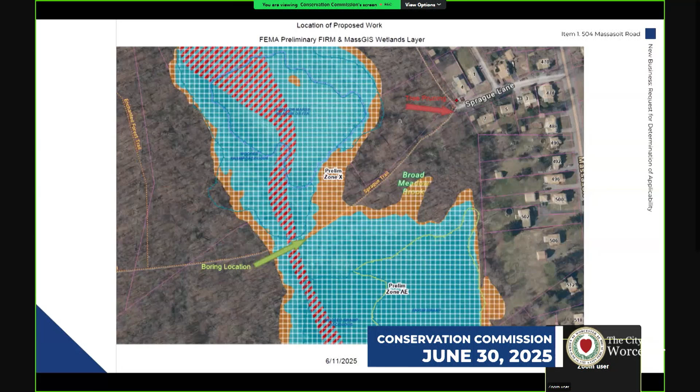So they're going to do one boring, which is located just at the end of the trail. It's within bordering land subject to flooding, within riverfront area, and within the 15-foot buffer zone to the bank of the brook, but it is outside of BVW. It's at the end of the trail, just outside of the wetland area. They're going to access the site using a tracked machine to get down here and dig the boring hole.

The work is expected to take one day. They're going to backfill all the spoils into the hole at the conclusion of work, and they should be in and out in a matter of hours. There will be some tree pruning necessary along the part of the path that's closer to Sprague Lane.

Which is well set back from the wetland areas. There's no tree removals associated with this, and the machine will be accessing this location on a compacted trail. Spill kits will be present on site. And I think that's about it. So I'm happy to answer any questions the commission has.

On the screen here, this is just a screenshot from Google Earth showing where they're going to be accessing the site from Sprague Lane. Going to relocate that boulder. This area here is outside of the buffer zone, but just to illustrate the kind of necessary tree pruning that will be needed. And we also have the equipment here, and I'll turn it over to the commission for any questions.

So this piece of machinery is a self-propelled piece of machinery, or is something bringing it into the woods? Yes, it's tracked machinery that will drive in, along the path. And so the only machine going in and out? Correct. Okay.

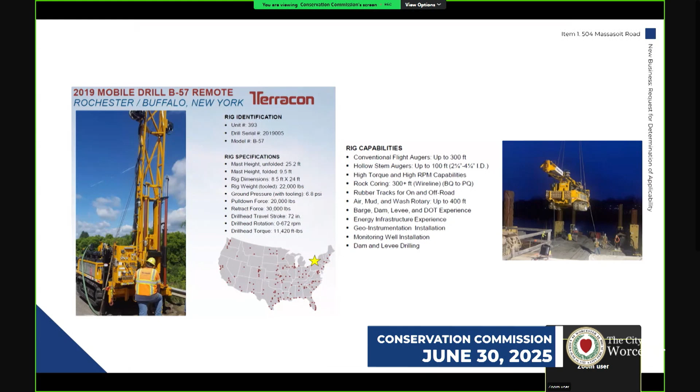Any reason to think that they would require additional borings, or would you be able to get all the samples that you need in the one visit? Additional borings aren't anticipated at this time. The engineering team is confident that the conditions in the area should be uniform enough that one boring will suffice for the design.

Okay. If any of the other commissioners have questions about this project? If you guys could just, yeah, I'm all set. Thank you, Stuart. Because I can't see you, so if you could, Lindsay, just say yes or no. I'll take that as a no. Are there any questions or comments from the public? Anybody curious about this or any questions? No?

Is there a motion to close the hearing? So moved. Second. Did we go to public? Oh, we did public, okay, fine. Yes. Okay. So then so moved if there's no objections. Second. Did I not need to close the hearing on this one? We can close it. We just need a motion for a determination, either a positive or a negative determination. Okay. But we can close the hearing. That's fine.

I move for a negative determination. Second. Commissioner Kirschner? Aye. Commissioner Nystrom? Aye. Commissioner Fertoni? Aye.

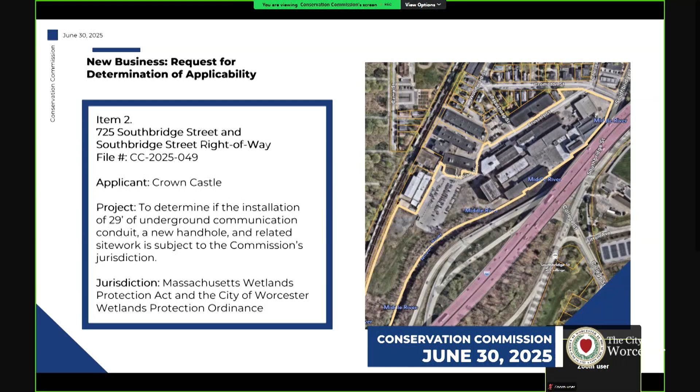Do I press this? It's green, on. So we should be able to hear you. Good afternoon. So my name is Magdalena Lofstedt. I'm a wetland scientist, and I'm representing Crown Castle.

We filed an RDA to seek permission to install approximately 29 linear feet of a communication conduit. It's a 4-inch diameter. It would run from Southbridge Street. The property in question here is 725 Southbridge Street.

The new conduit would run from the existing handhole that's located within Southbridge Street. I don't have a pointer, but if you want to, you can bring your microphone up if you want to point to the location. It's pretty clear, it's the red box. Yep, okay, great, thank you so much.

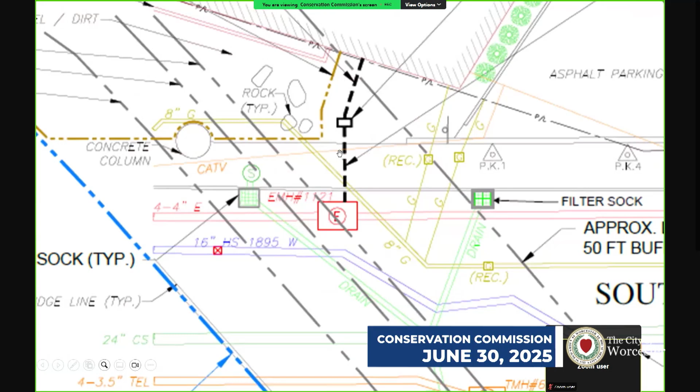It would run from that existing handhole to the building, and in addition, a Crown Castle manhole or handhole will also be installed. The area is previously disturbed. As you can see, it's a degraded landscaped area. Then we have the concrete sidewalk, and then the existing handhole is located right along the side of the street, just beyond the concrete sidewalk.

The purpose of the project is to boost wireless speed and capacity for the new owners of the commercial building. The conduit will be installed using open trench excavation. The trench will be 4 feet wide and 3 feet deep. Upon completion of the installation, all existing grades will be restored to pre-existing contours. The work is located within the 50-foot buffer zone, the 100-foot buffer zone, as well as BLSF according to the preliminary FEMA maps.

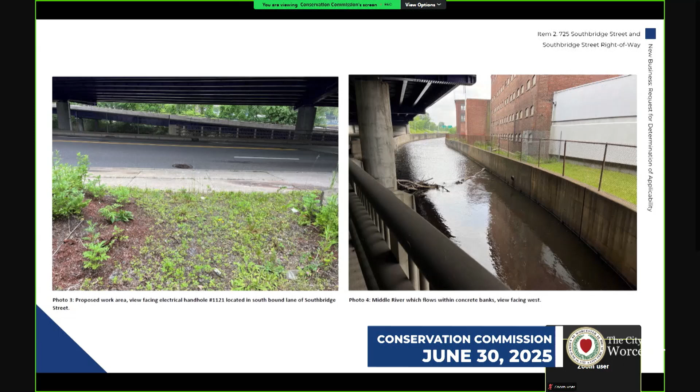It's filed as a limited project according to 1053-3D, so it doesn't require a filing under the Massachusetts Wetlands Protection Act under minor activities in buffer zone.

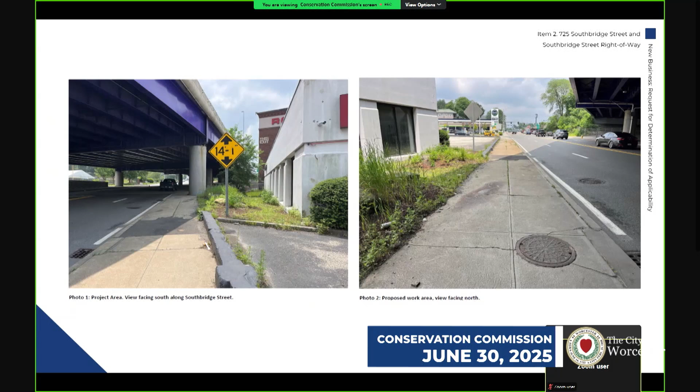The total disturbance within the buffer zone is approximately 120 square feet. Out of that, about 100 square feet is within the 50-foot buffer zone. The only work within the 30-foot no construction setback is accessing that existing handhole within Southbridge Street, so there's no excavation in the 30-foot zone.

We are proposing to install filter socks in the existing catch basins to prevent any sediment from entering the Middle River, which is the resource area that this work is adjacent to, and also compost logs along the limit of work, shown in brown on that plan.

A traffic management plan will be developed. The work meets the performance standards of the local ordinance and regulations for work within buffer zone, and also meets the performance standards for work in BLSF under the Mass Wetlands Protection Act.

So I guess I'll open it up to questions. Staff?

Staff's main concern was it's within bordering land subject to flooding, so we requested that they provide evidence that they meet the performance standards of bordering land subject to flooding, which they do, so they're going to return to existing grades. We also requested that they show inlet protection in all the catch basins, which they have updated in the plan provided today, showing inlet protection on all those catch basins. So no concerns from staff at this time.

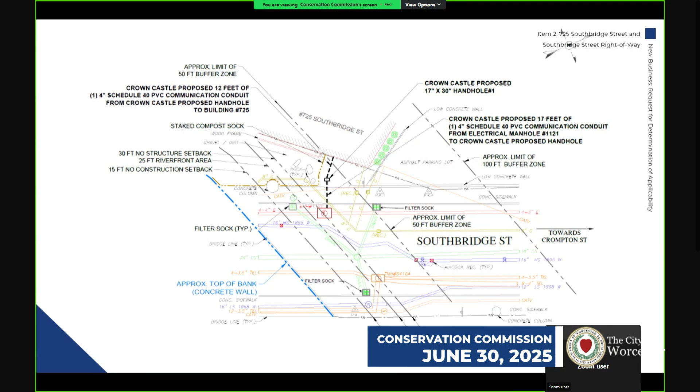Item 3 was postponed. Item number 4, 277 Providence Street.

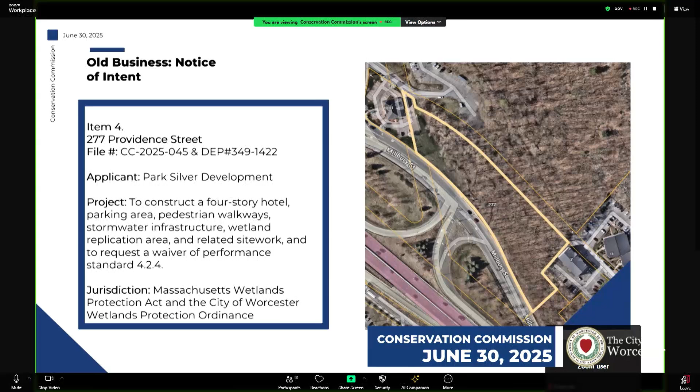Hi all, Tom Schutz from Goddard Consulting here on behalf of the applicant at 277 Providence Street.

At the last hearing, we introduced the project to the commission, and we've now made some changes and improvements to the site and added some replication to our site, because previously we had submitted the application without any replication, even though we were filling some bordering vegetated wetland. It took a little bit of work, but we've come now with 1.5 to 1 square feet of replication for the wetland that we will be potentially filling.

Right in the middle of the site is the bordering vegetated wetland. It's 1,545 square feet. In order to mitigate for that and get to the 1.5 to 1 mitigation or replication required under the Worcester Wetland Bylaw, we have 2 replication areas.

One replication area is in the northern portion of the site, approximately 1,603 square feet, and a second is in the western portion of the site, essentially 960 square feet. That total is greater than the 1.5 to 1 ratio required under the bylaw.

This is just a small replication planting plan. We'll be submitting a full comprehensive replication plan and procedure later on. This is just to show where the plants are going to be going, the species we're looking to put in, and also the type of seed mix.

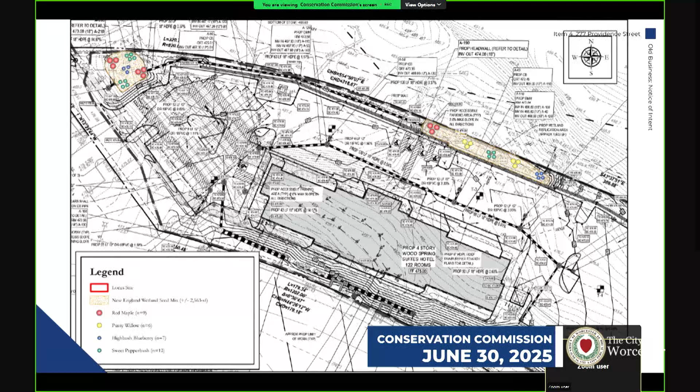Okay, thank you. So do we need to vote for a continuance or postponement? Are you guys okay with the next hearing on July 21st? So it would be a motion to continue the hearing to July 21st. So moved. Second. Commissioner Kirschner? Aye. Commissioner Nystrom? Aye. Commissioner Tony? Aye. Okay, see you next month. Thank you.

Next item, number 5, 522 Grove Street, notice of intent.

I think we have the applicant online. I just gave you permission to unmute yourself, Sebastian, if you want to give a quick overview. Absolutely, Sebastian, the owner of 522 Grove Street. We've been working with the city to take care of the dock at the end of the property, and also the boat dock with the pontoon on the end that we're getting through the permitting process with the city. We've been working with Maddie Vanderboom, she did a site visit and talked us through doing the paperwork properly, and here we are now.

Staff comments? As the commissioners may remember, this was an enforcement order, or it still is currently an enforcement order, issued back in 2020 essentially for the structures, the deck at the end of the peninsula and the new dock. The commission voted to require that they file a notice of intent to properly permit these structures. They did waive the need for engineered plans for the dock and the deck, so staff helped them work through it, and DEP finally issued a file number. They did have concerns about BVW being present on the site, but staff conducted a site visit and confirmed there wasn't BVW on the site.

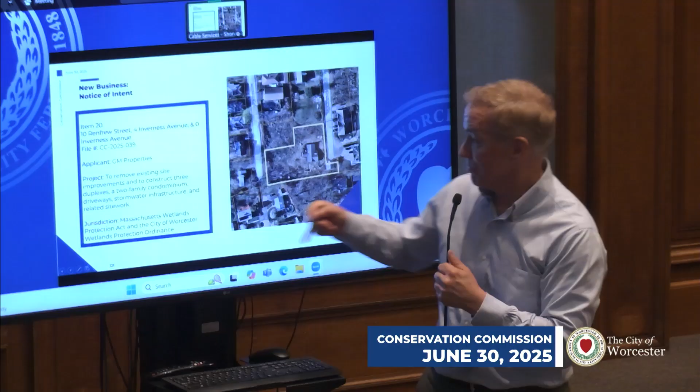Yeah, you can see it on the aerial view. You're not driving through here, at least not easily. And so that's what's in place now. You can see that there must have been more yard at one point, but it's rather overgrown now.

The applicant at different points had looked at different options for what he might try to do on site. That's why we actually went out here 2 different times doing deep holes. The site is all mapped as Chatfield-Hollis Series soil, one of the kinds where, when you see it on the map, you think okay, are we going to have ledge here? And we actually did, on something like 4 out of 5 deep holes - we didn't have a big machine, so maybe that's a factor, but we got refusal in the hole, meaning we could only dig so far down before hitting rock that couldn't move.

But the soil itself was actually pretty good. We characterized it all as sandy loam, but it was almost the next category up, loamy sand. So we're actually being a little bit conservative in all our estimates of how much effect we're going to get from infiltration of groundwater. So what's proposed - I guess I'll ask you to jump back to the other sheet again -

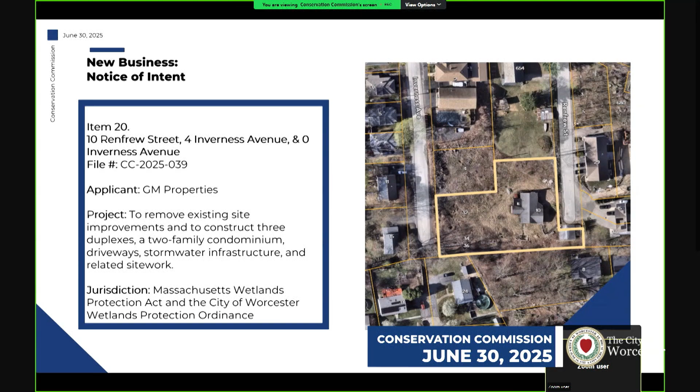is 2 duplexes on Inverness Ave, another duplex on Renfrew Street, and a 2-family condominium at the very end. These would all have pretty moderate slopes. Nothing is going to exceed a 2-to-1 slope here. We're not even proposing any retaining walls. We have no wetlands on or near this site.

I do want to say, yeah, this is the benefit of coming to the meeting. You see a question, go to another person, you say, oh, did we handle that? And you ask someone about catch basin protection, and I went back and looked at our plans, and I thought we had put in a note saying there would be silt sacks in these 2 catch basins, and these 2, before work starts, but there is not a line to that effect. So we would certainly expect, if there's an order of conditions issued, that that would be added to it.

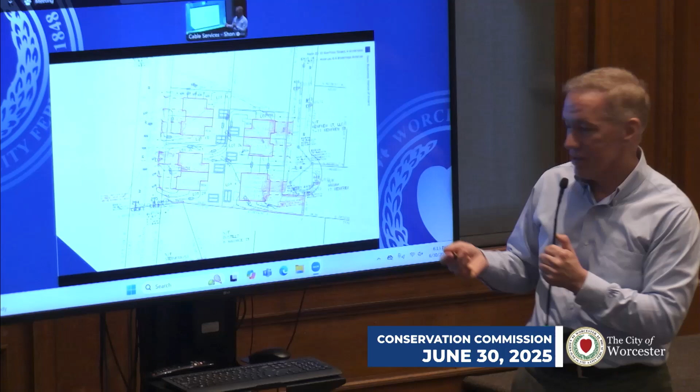So again, we're here because both of these buildings are within 100 feet of this catch basin. This one obviously is within 100 feet of this one. 100 feet just gets you onto this lot, doesn't quite hit that proposed building, but this is why we're here - the proximity of work to catch basins, again, both existing ones, on Inverness Ave and on Renfrew Street. And it's actually kind of an interesting spot.

This is sort of an abandoned house. If you go out there, I don't know how long it's been since anyone was living there, but you have a kind of interesting effect. You drop down away from Grafton Street, and you don't really experience the noise or whatever of Grafton Street in this particular spot. It's kind of a nice little spot.

And again, we're going to grade this - there's sort of 2 levels here. You sort of have the 514 and 516s, and you're in the 520s to 530 at the front of these lots. These buildings would both be walkout back, where this one would not be. This one would also be, and just to make the grades work with the least amount of work.

And what you see here, these symbols with some hatching in each case—this is an infiltration structure with 4 Cultec chambers for each unit, and a single one receiving the condos.

So what we have for you, I think, is a pretty straightforward, pretty unobjectionable project. I did leave one note out, which I realized after listening back to a couple hearings: if it was the commission's sentiment to issue an order, I'd ask that silt sacks be in place before any earthwork begins on any lots. But I'll try to answer any questions.

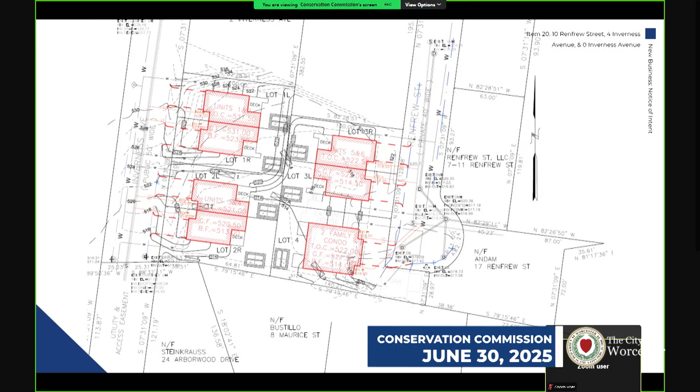Yes. So the stormwater calculations indicated there'd be a slight reduction to the abutters. The way it was modeled to the abutting property of the gentleman speaking: during the 2-year storm, pre-existing conditions have 0 CFS of flow; 10-year storm, 0.01 CFS; 25-year storm, 0.02; and 100-year storm, 0.05. Those were reduced to 0, maintained at 0.01, reduced to 0.01, and 0.03 CFS under those four storms. In fact, I just realized looking again at the plan that we actually specifically created a swale here to keep the runoff from the side of this unit from going to Mr.

Steinkrauss gets very little now. So this swale, if you look at this 514 contour going from the back of this unit, comes around, goes towards Inverness Ave, comes back, and that's all to indicate that you're creating a swale to catch runoff. The raindrop that falls here in the future would go down and then over and probably eventually get

into Bustillo's property, where most of the runoff goes now. So we actually did specifically grade it to keep future runoff away from you. But it also sounds like runoff from the street going into Inverness Ave is also making its way down to your property, and that's where we're seeing the biggest increase in peak flows.

Biggest being a moderate term here, because we're still talking about less than 1 CFS, but we're going from 0, 0.01, 0.02, and 0.05 to 0.09, 0.18, 0.26, and 0.43 to Inverness Ave.

So I guess that's why we would want to see peak rates reduced to all design points, so that there wouldn't be any potential negative implications for the city drainage and for the property owners abutting it.

You said one of the drains was completely buried. Yeah, one of the existing catch basins at the end of Inverness. Does anyone know the condition of the structures themselves? Is it completely buried? I assume nobody's been cleaning it out.

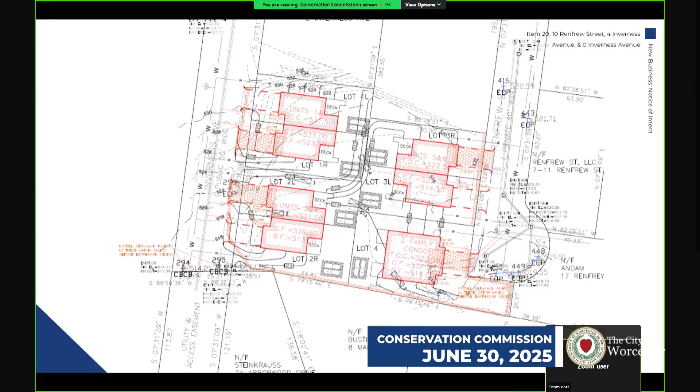So moved. Second. Commissioner Kirchner? Aye. Commissioner Nystrom? Aye. Commissioner Fatoni? Aye. Okay, so we'll see you in July. Thank you. Okay, thank you.

No additional hearings, right? Seven postponed, 8 postponed. Number 9, request for certificates of compliance.

So first up, we have 262 Mill Street. You guys may remember this project. This was the enforcement order we issued for a veterinary clinic who was supposed to do wetland replication. They had come for a COC, and we noticed that they never did the wetland replication, or at least it didn't take. The project originally came through in 2001.

Right now, they're looking for a partial certificate of compliance. Essentially, it's a tiny little lot, the proposed Lot A on the plan here. They're trying to help out their neighbors and sell that lot to them. This is not in the location of the wetland replication area, and the veterinary office and the wetland replication would still be under the order of conditions. So they were hoping to get a partial certificate of compliance.

At this point, they have done the replication area. It's just in the monitoring stage, so they have to monitor it for 2 growing seasons. But staff doesn't have any concern with the partial certificate of compliance for this Lot A that was divided off as an ANR, I think, last winter.

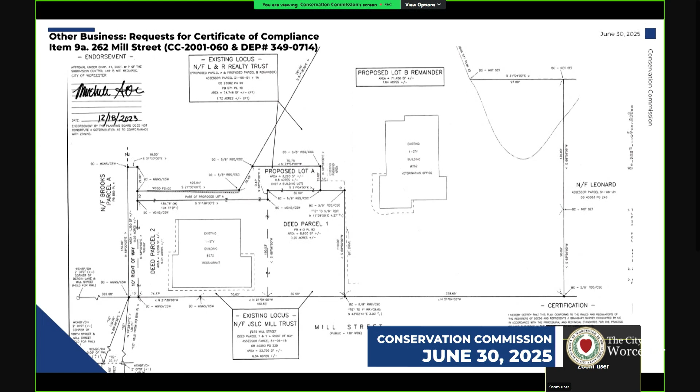All right, so 3 Knollwood Drive, this is also an enforcement order that we had. This was one that went through in 2020. Essentially, they filed a notice of intent with the Conservation Commission.

They had an order of conditions. The order of conditions did expire last year, but then they were renewed later on. So we had reissued an enforcement order to allow them to do the work under the notice of intent, but it ended up they got renewed anyways. So they have completed the work.

Originally, they had filled in bordering land subject to flooding. They had removed some vegetation within the buffer zone. At this point, they have restored all the grades to what was previously existing, and they have done all the required plantings. Staff did go out and visit, and the plantings, although small, are healthy and growing.

So at this point, I think staff would be comfortable with issuing a certificate of compliance to close out the order of conditions. It's also worth noting the enforcement order was just to allow them to do the work. There was no monitoring conditioned into the original order of conditions issued, so staff would be comfortable with the enforcement order also being lifted off this property as well.

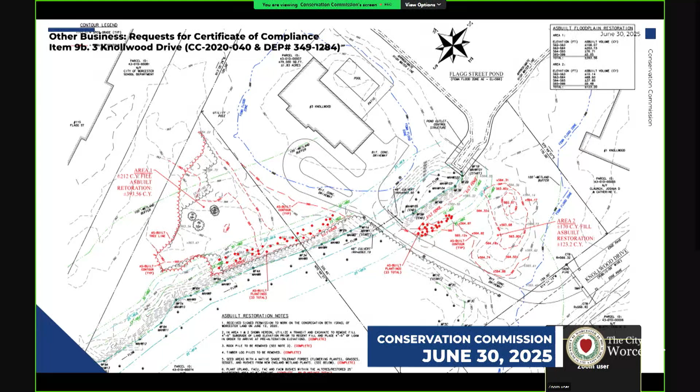And then I guess an additional motion to close out the enforcement order. So moved. Second. Commissioner Kirchner? Aye. Commissioner Nystrom? Aye. Commissioner Fatoni, aye.

All right, our final certificate of compliance is for 136 Burncoat Terrace. You may remember at the last meeting they requested a certificate of compliance, but the grass hadn't grown in yet. Staff revisited it on June 26th, and the grass is fully grown in. There is a weird drain line along the side of the property, but it turns out the neighbors uphill have their gutter draining through there. The neighbors are working on a better drainage solution than dumping water onto their new neighbor's property.

They would be looking for a complete certificate of compliance to close out. This was a local-only filing, so no wetlands near the property.

Without objection, so moved. Second. Commissioner Kirschner? Aye. Commissioner Nystrom? Aye. Commissioner Fatoni? Aye.

How long do we give the other house to fix their water problem before they're in an enforcement order? I think they are working with ISD, somebody mentioned. At least it wasn't the swimming pool. Right.

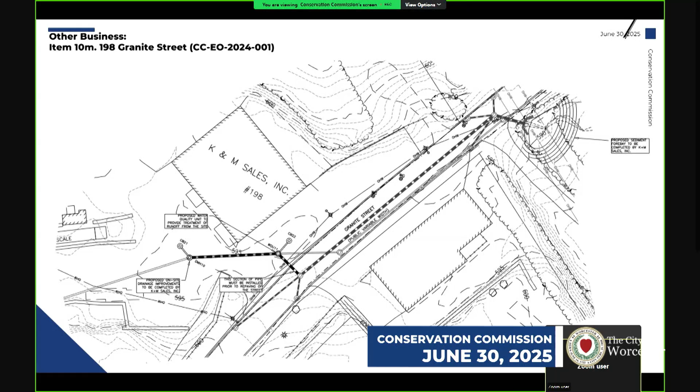Anything else? All right, and then an update for 148A Torrey Fort Lane. They were required to do plantings by today's date, and they planted white pine and sweet pepper bush over the weekend. Also, naturally, a lot of the vegetation has grown back in. This was the property where they were looking to build a single-family home.

They got overzealous with the clearing of the lot, getting into the 15-foot buffer and the bordering vegetated wetland as well. But it's nice to see everything coming back on its own, and they did the additional plantings we required. Just wanted to give you that update.

So they still have an open order of conditions for the actual construction project? They do, yeah. Okay.

Staff doesn't have anything under discussion of active projects, unless the commission or chair have any projects they want to discuss.

On the open space discussion, maybe I can turn it over to Lindsay, but we did receive word from the Community Preservation Committee that the Brooks Dairy Farm acquisition project was recommended for funding through the CPA.

So at this point, the Planning Division intends to apply for that land grant, and hopefully we can get that and complete that acquisition. Lindsay, I don't know if there's anything you want to add from the CPC process.